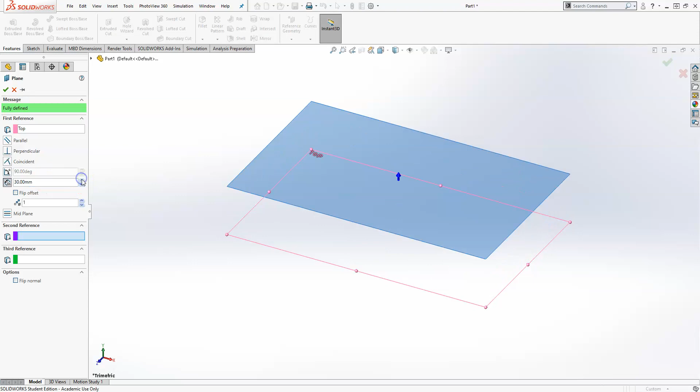So what we need to do here for a loft is, because we're going to create many profiles, we need a few planes to create those profiles on. So we can create a plane. I'm going to create a plane parallel to the top plane. I'm going to select my top plane, and then I'm going to choose plane. So already selected that top plane, and then I want to choose, let's do 30 millimeters from that. So now I have my base planes, and then I have plane 1, which is 30 millimeters from the top plane.

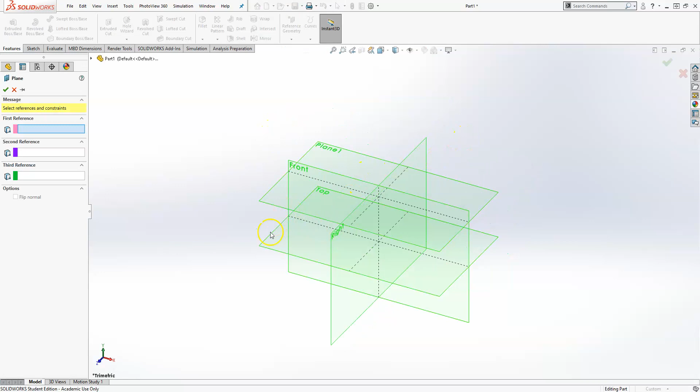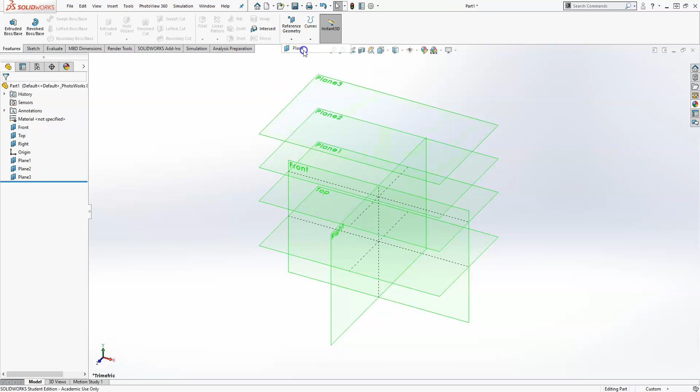I would like to create 4 planes in this direction that are all parallel. So I'll choose that one. I'll make this one 30. Let's make 2 of them 30 apart, and we'll click OK. Then we'll choose a plane again, select this last one, and we'll make this one 20, a little bit closer. So now we have a series of 1, 2, 3, 4, 5.

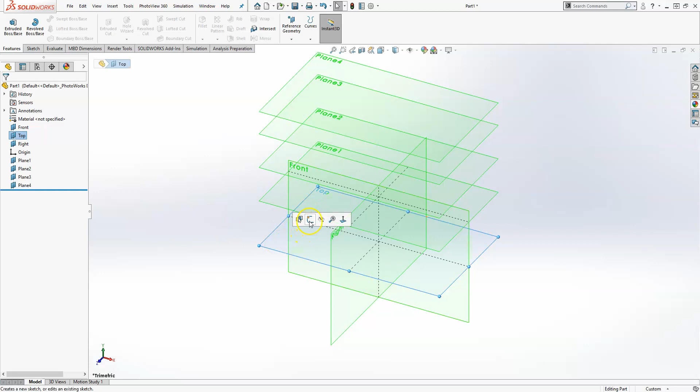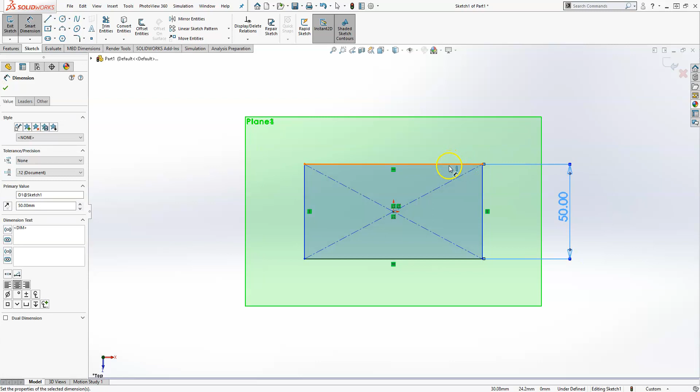So now what I want to do is create a series of profiles that allow me to loft them together. Let's choose this top plane and we'll create a sketch. Just by clicking, it brings up the window and I choose my sketch. We'll start out with a center rectangle. Go ahead and turn off those planes if that's getting in your way. Put a rectangle there, and let's make this 50 by 75. And that's fully defined. So that's the first.

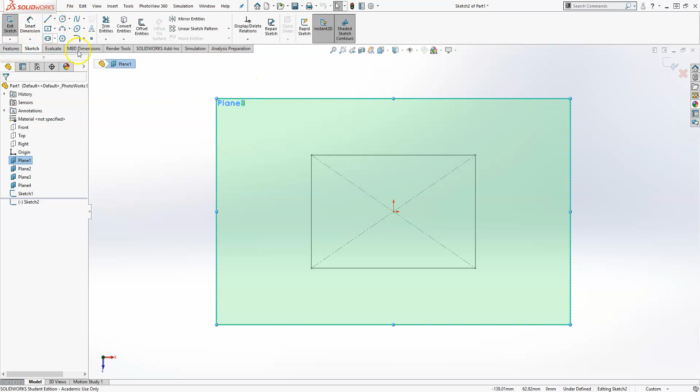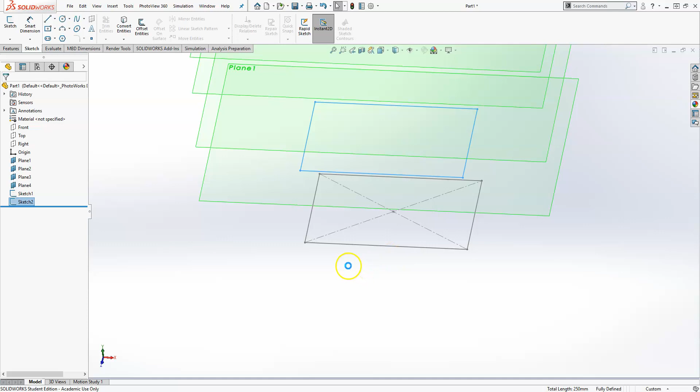So we will then sketch on plane 1, and we'll go normal to it. This one I want the exact same thing. There's a couple of ways you can do that. We could sketch another rectangle right on top, but there is this convert entities function. The convert entities allows us to select those 4 edges. You can also select the chain and click OK. What that does is it takes what you selected and brings it to the plane that you're sketching on. This little symbol means it's on the edge, so basically this edge and this edge are exactly the same. We'll accept that, so you don't need any dimensions or anything. As this rectangle would get bigger, so would that.

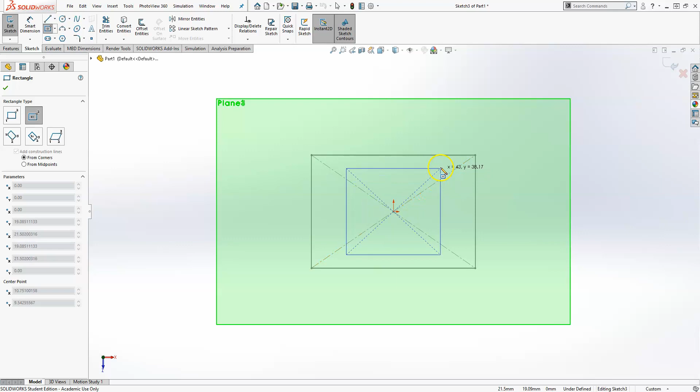So we'll sketch now on plane 2. We'll hit the space bar and go normal to it, and we will sketch a center rectangle, and make it a little bit smaller. We'll make this one 40 by 35. So there we have 3 profiles on 3 different planes.

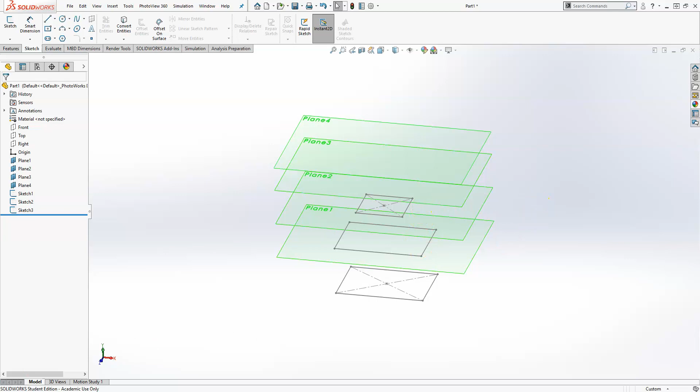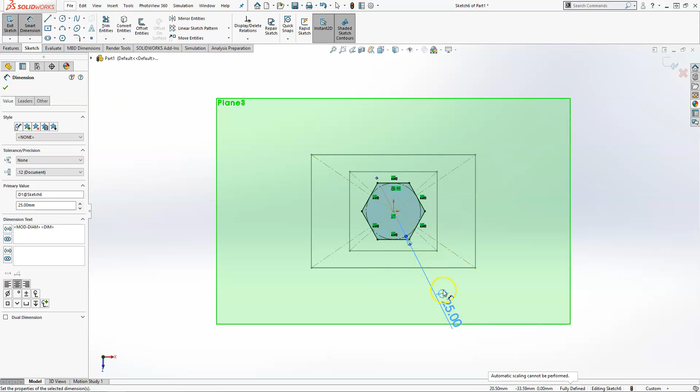So let's choose our next plane and we'll sketch on that. We will create a polygon. Let's create a 6-sided polygon from the center. We need to make one of those either horizontal or vertical depending on how you want it. We'll add a dimension, and we'll actually dimension the circle. So the circle is any opposite 2 edges will be that dimension as well. So we're fully defined.

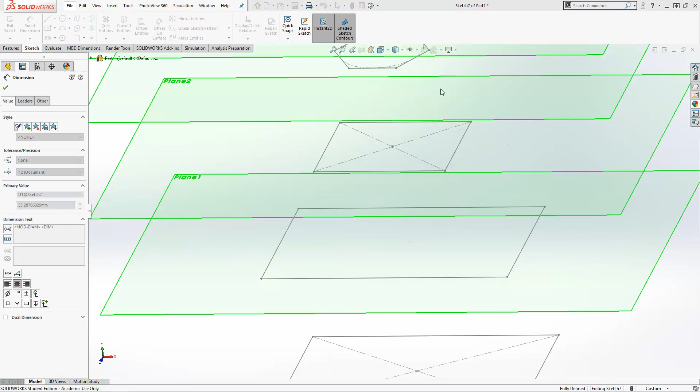Now this last plane, we will draw a circle. I can just use the origin that's there and not actually go normal to it, if it's not too complicated of a shape.

So now I have 5 profiles that I will loft together. Let's go over to features, and you'll see now that I have more than one profile, so I can choose the lofted boss/base.

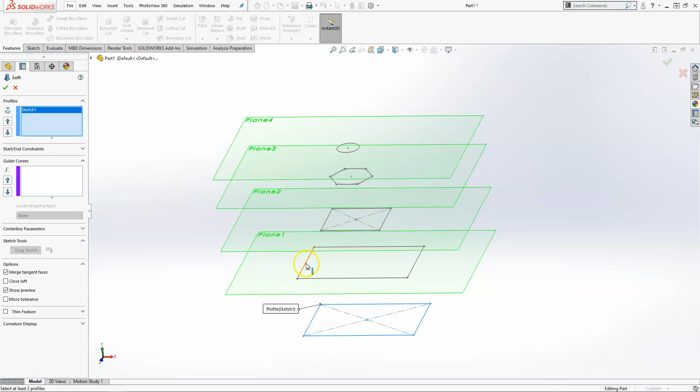Basically we're going to select our sketches and our profiles as our sketch, and then it will fill in and transition between them.

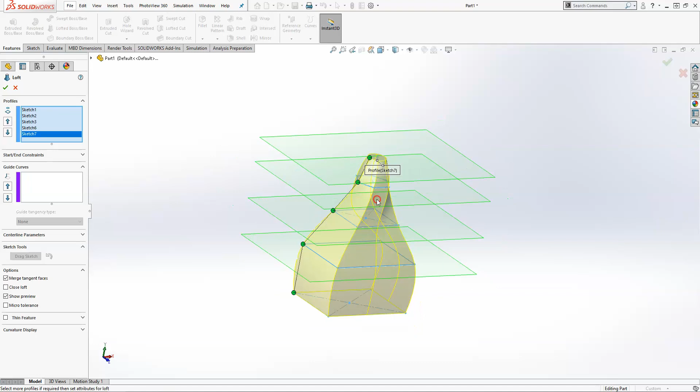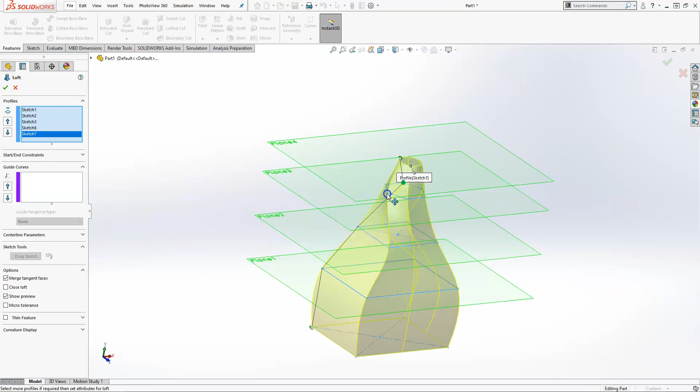One thing you'll notice is how it twists, and this is based on the starting point of your sketch. You can quickly and easily move them to make the shape more pleasing, or if you're going for a more organic shape, you can make them twist.

The transition here from the 4-sided to the 6-sided shape is interesting, and the same for the 6-sided to the circle. That's also interesting, but let's leave that there.

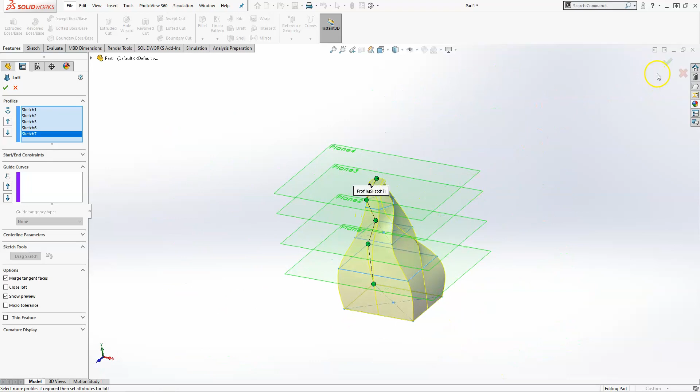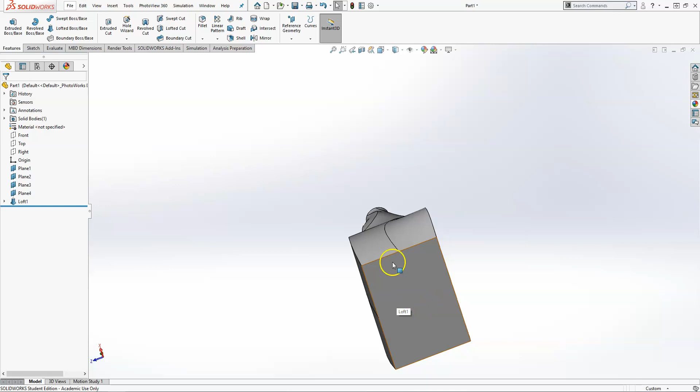If we want to turn off all our planes, we can do that. So we've now created this unusual shape. It looks almost like a nozzle or something. It allows you to go from whatever shape you start with and transition it to a different shape over that series of profiles.

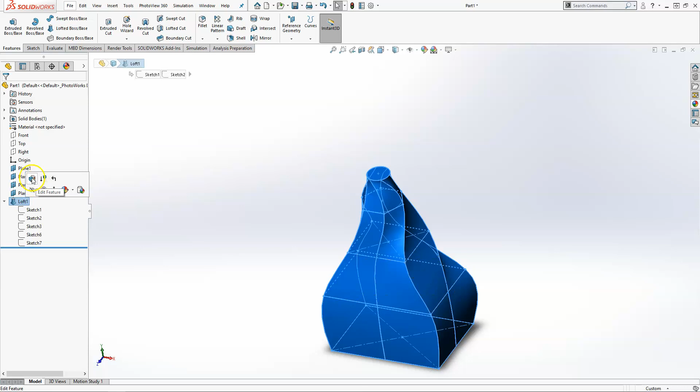If you want to change any of those sizings or whatnot, you can create a different shape. You can reorder the sketches and change all these points as well, adjusting them around to get that twist or something different.

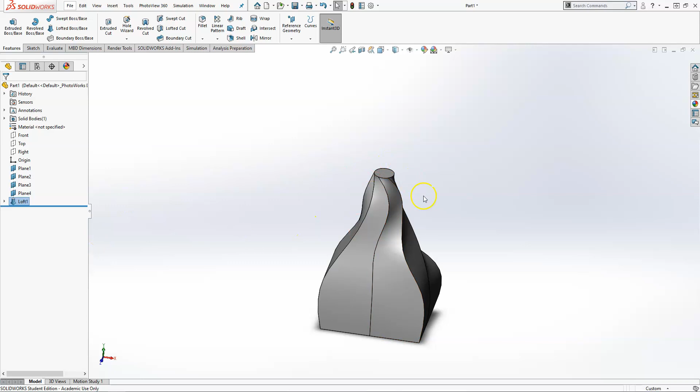So I've just realized I want to add in another endpoint. I'm going to create a new plane rather than starting from scratch.

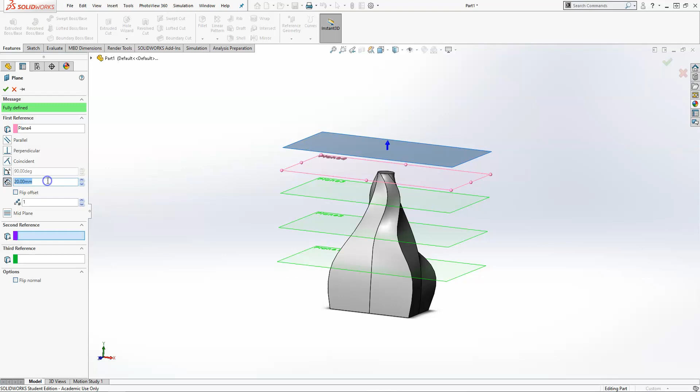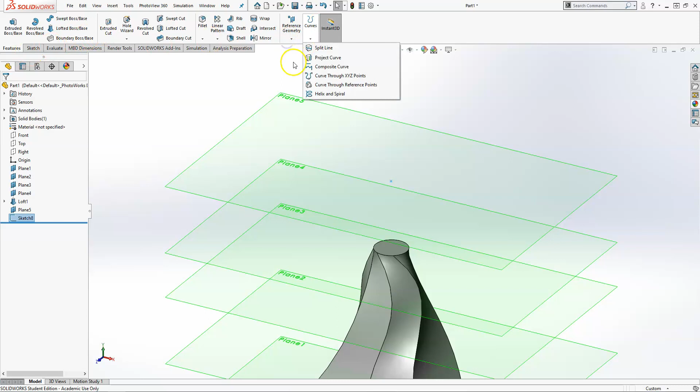Let's make it 20 from that last plane. On this plane, all I'm going to do is use a point, so I want my circle to end in a point. Points are easy to sketch - you can create a point in your reference geometry as well, but that's just in a sketch.

So now I have this sketch that I can add to my loft. But as you can see, it's not actually available because I made the sketch after I made the loft. So what we can do is click and hold, and I can drag my loft all the way down. This point has no association with my loft yet, so I'm able to just drag and pull that loft all the way past.

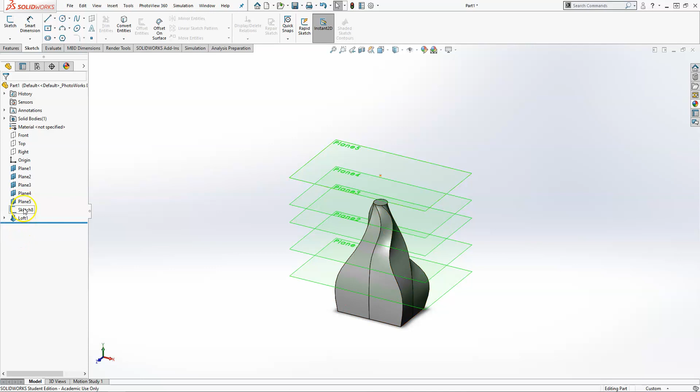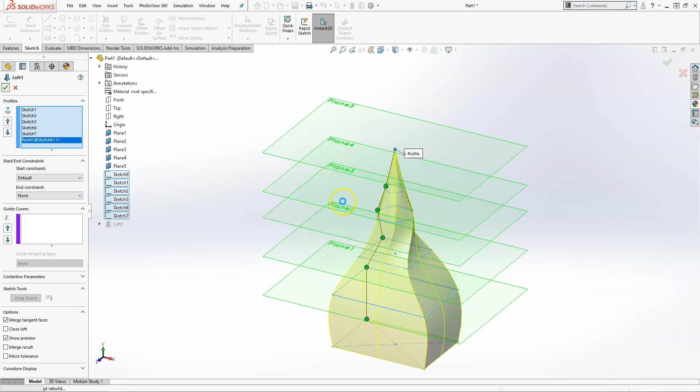So now if I were to edit my feature and add in that last point, I'm just going to select that point. And as you can see, now I've made my loft into a point, as I wanted to make something pokey, I guess.

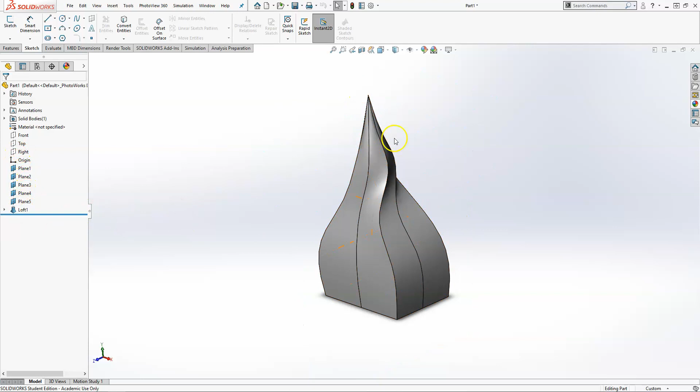So that's a loft, where you're creating many different profiles of any shape you want on different planes to create this somewhat organic shape. If you choose different size rectangles, you can get them to transition between each other. So let's go back and delete our point and our last sketch.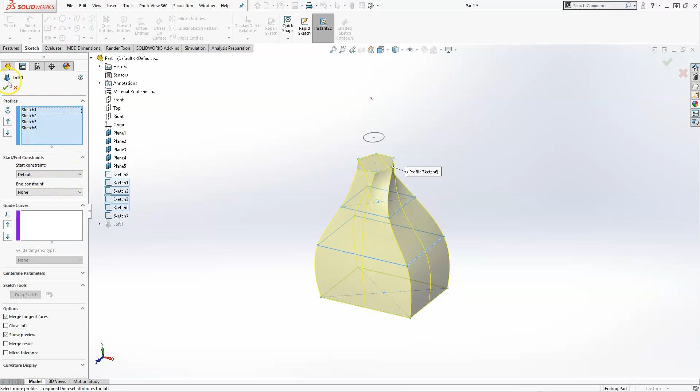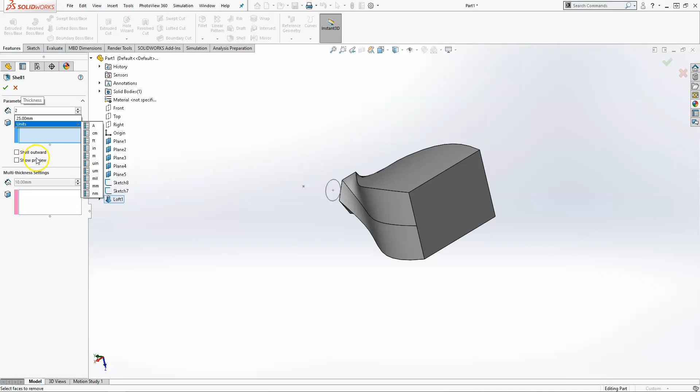Say we're transitioning from a square to a six-sided shape - maybe this is some sort of ducting for HVAC. We'll make it 2 millimeters thick, show a preview, and select both of these faces, and we've basically made some cool looking nozzle thing that you can mate to a square and a rectangular or hexagonal shape.

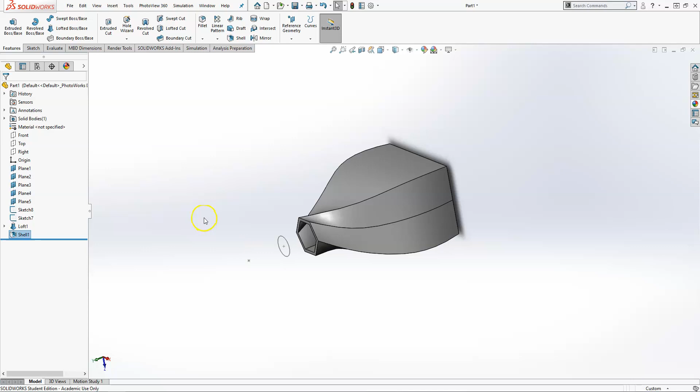So that's the loft and some of its functionality. You need planes and profiles, and then you can loft a boss. Thank you.